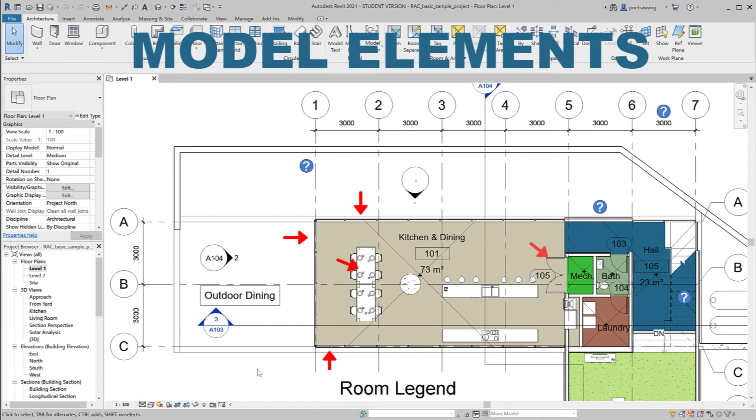Take this sample project for instance. The dining set that you see on the floor plan is an example of model elements. Windows, doors, toilet, kitchen sink are also considered model elements as well. The next item is datum elements. In order to understand datum elements, it helps to have some basic understanding of how three-dimensional software works.

Three-dimensional software utilizes a Cartesian coordinate system, x, y, and z, in order for an object to take physical form in three-dimensional space. Points are created in relationship to the origin, which is where x, y, and z intersect. And those points in turn give a physical object width, height, and depth.

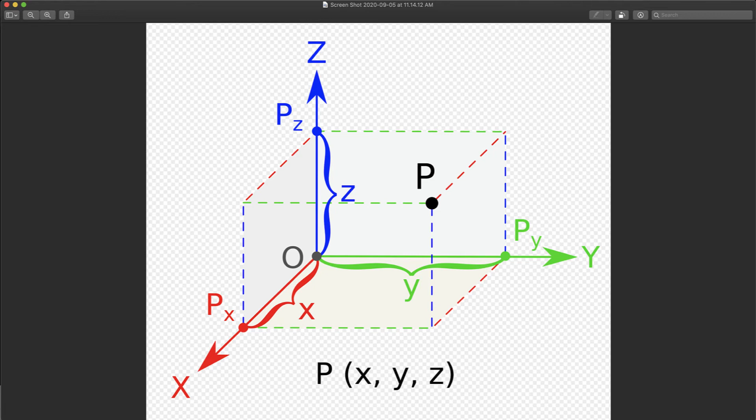Now in order for an object to exist away from the origin, an offset is used. An offset can be from one axis or all three axes at the same time. It can also be in the positive direction or negative direction or a combination. For example, column grids are used in floor plans to give horizontal references in the x and y direction. On elevations and sections, elevation levels are used to give vertical references in the z direction.

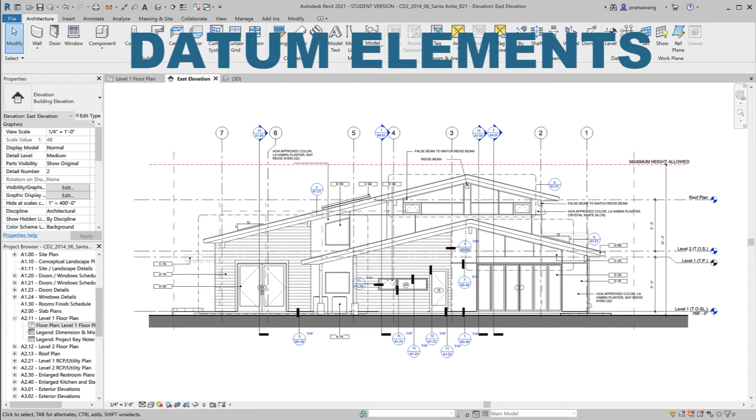It is kind of tricky at the moment to show you an example of how column grids are used, but I can give you a quick example of how elevation levels are used as a reference. If we just take a quick look at window number 28 on the floor plan, right-hand side of the screen, it is selected at the moment, and in the property palette, it is referencing Level 1 Top of Slab.

Beneath that, it is showing that the bottom of the window, which is the window sill, is offset 3 feet 6 inches from Level 1 Top of Slab. So the selected window is currently referencing Level 1 Top of Slab. Now if you can imagine with me that Level 1 Top of Slab is a sheet of paper that spans horizontally to the infinite, and we're using this plane as a reference plane.

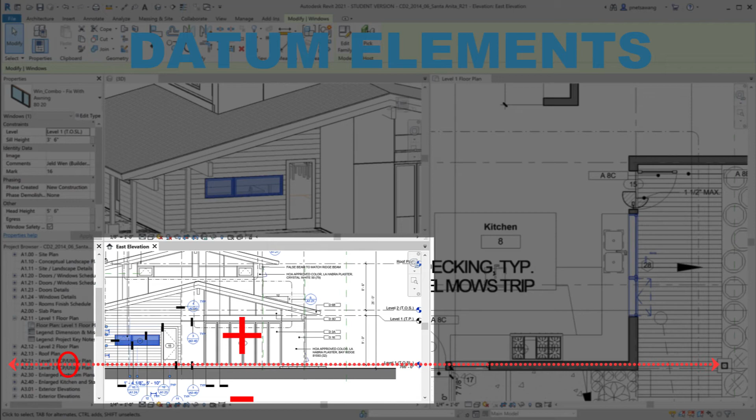The location of this plane is 0 in the z direction. Any object above this plane will have to have a positive offset. Or if you want any object to be below this plane, the offset has to have a negative value. Now if I want this window 28 to move down, I have to reduce the offset and therefore make the window closer to the reference plane. Here I am going to change the value to 2 feet 6 inches instead of 3 feet 6 inches.

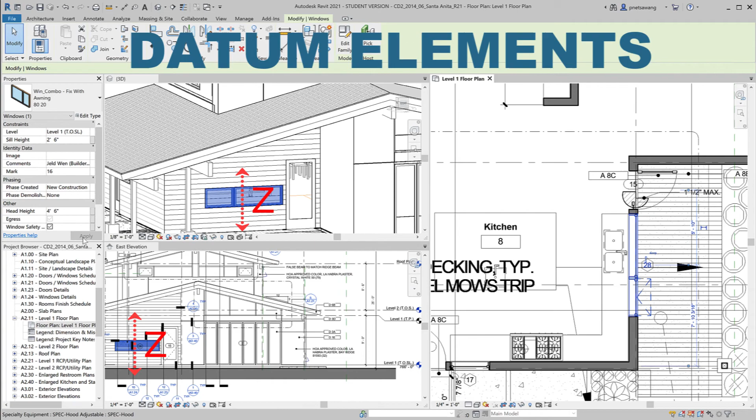You will see that window 28 moved down from its previous location. What just happened was the window shifted along the z-axis and toward the negative direction. Now, the bottom of the window or sill is 2 feet 6 inches from Level 1 Top of Slab.

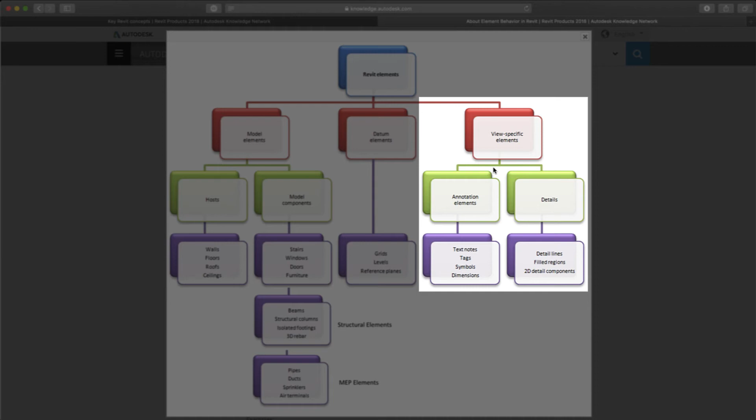Finally, view-specific elements. Think of view-specific elements as elements that give your project a final finishing touch. Examples of view-specific elements include dimensions, annotations, room tags, window tags, etc. Back to our example floor plans, you can see that we use dimensions to give us, for example, distance between grid lines, width of specific rooms, and location for windows and doors.

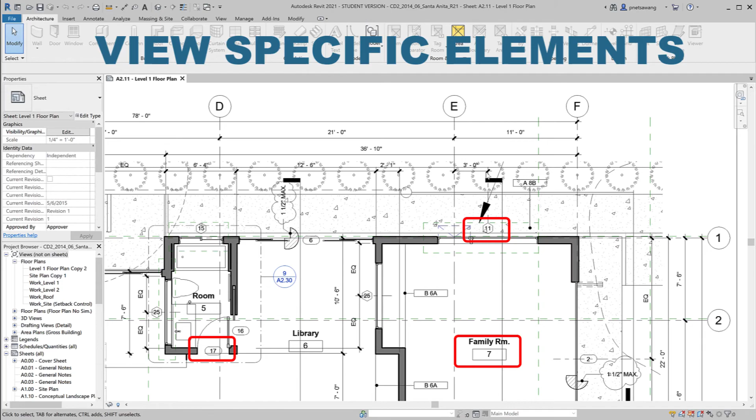Room tags, window tags, and door tags give us reference to the room finish schedule, door schedule, and window schedule. View-specific elements exist in a specific view only and will not get transferred to other views unless we specify it. Those are just a few examples of view-specific elements.

Next, I want to talk about element hierarchy. Every Revit element is organized in this fashion. It starts with category, then family, then type, then instances. With category being at the highest level, it is the most general, and instances at the lowest level, it is the most specific. Let's pause for a moment and think about category.

Category is something very, very broad. For instance, plumbing fixtures is a category because plumbing fixtures can include toilet, sink, faucet, etc. Furniture. Furniture can be a category because furniture can include chair, table, coffee table, etc.

For this example, we're going to take a look at walls. Wall falls under category, but then it can be further defined by stucco wall, concrete wall, or CMU wall. Those three items belong to family.

Now if we just focus on stucco wall. Stucco wall can have various thicknesses. It could be 4 inches thick, 6 inches thick, 8 inches thick, or even thicker. Now these thicknesses further define stucco wall, and therefore they belong to type.

And now if we focus even further into just one type of wall, let's take 8 inches stucco wall for this example. This 8 inches stucco wall can be stuffed with an R15, an R19, or an R30 insulation without affecting the thickness of the wall. And therefore, the 8 inches stucco wall with different types of insulation falls under instances. Hopefully you can see now how element hierarchy starts from the most general and works its way towards specific.

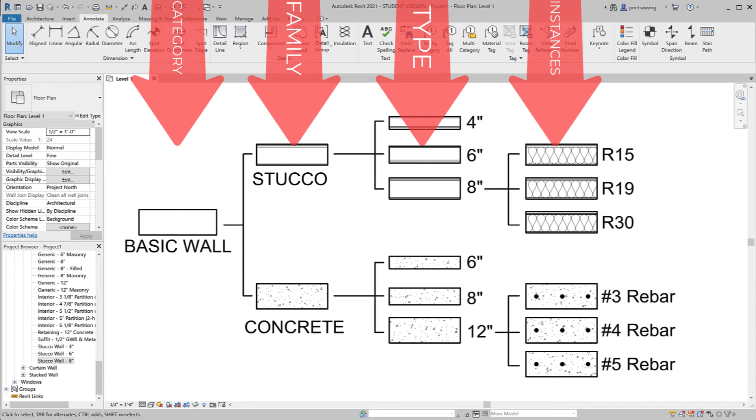A similar situation can happen with a concrete wall. Concrete wall can be 6 inches thick, 8 inches, or 12 inches. Take 12 inches concrete wall for example. The 12 inches concrete wall can have different sizes of rebar. It can have number 3, number 4, or number 5 rebar.

Let's have a look at how this wall originated in Revit. So if I go to Architecture tab, Wall, that is the category. Then on the Properties palette, under Type Selector, I can select the family and the type of wall here. On this list, various wall families and various wall family types are displayed. If I scroll all the way down, these are my custom stucco walls. So here you see that stucco wall is a family and the type of stucco wall is 4 inches.

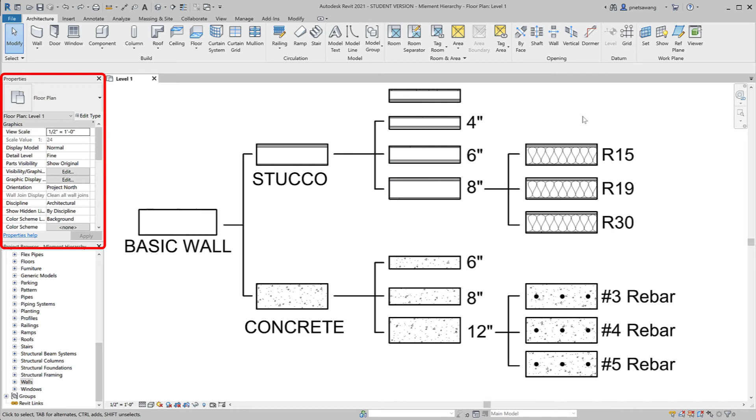If I take this wall by clicking it and place it here right next to my previous 4 inches wall, it'll look identical. Now if I click on the existing 4 inches stucco wall, the Properties palette will show us that the wall family is stucco wall and the family type is 4 inches.

Now I'm going to select the 6 inches wall. Here, the wall family is still stucco wall, but family type is 6 inches. Again, the wall family here is still stucco wall, however, the family type is 8 inches. If I work my way to the right and select one with the R15, you will see no changes in the Properties palette.

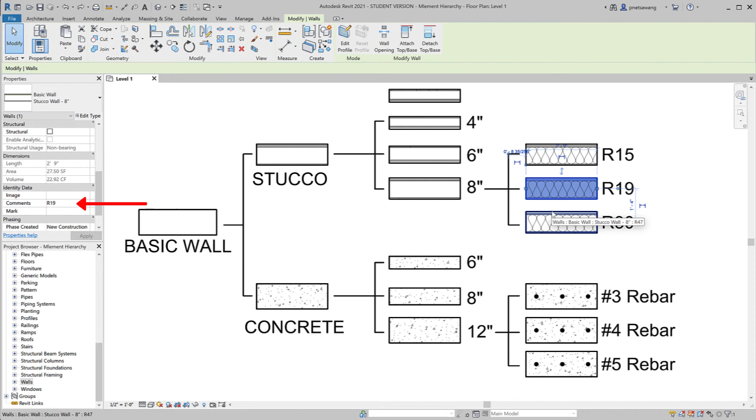However, if I scroll down and look under comment, I made a comment at an instance level that said this wall has R15 insulation. I'm going to work my way down again and click on the R19. The comment changes again at an instance level that said R19 and R30 and so on. Notice that for the 3 walls selected previously, the category, family, and type remain the same. The only difference between those 3 walls is the comment, which was made at an instance level. The same structure works for concrete wall as well.

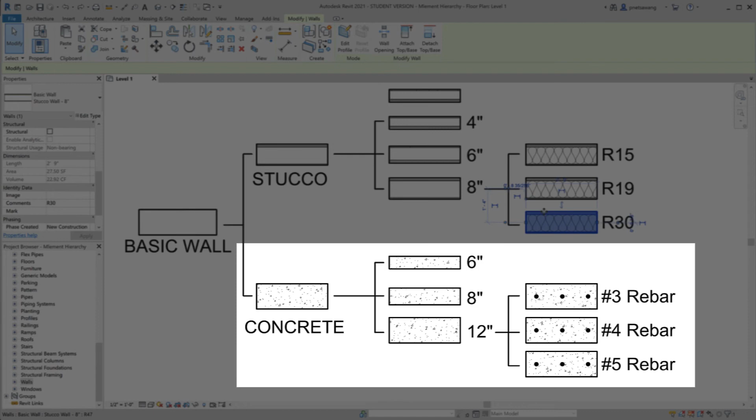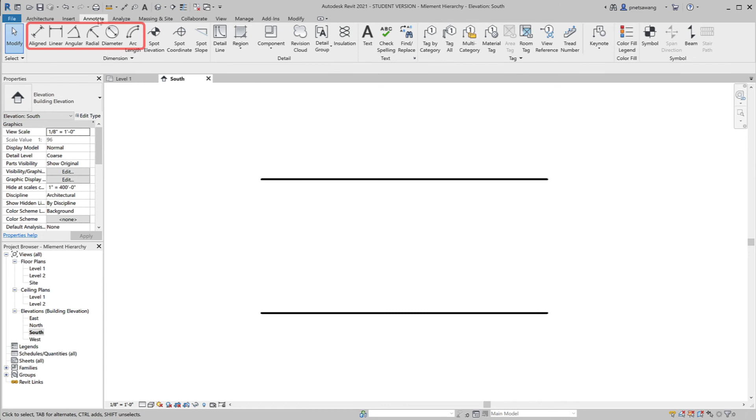So far, the examples I gave you were of model elements. Let's see some examples of how element hierarchy looks in view-specific elements. Let's take dimension for instance. To select dimension, on the screen, I will select Annotate tab. Then right off the bat, you see that dimension is the category, and you see different types of family, which are aligned, linear, angular, radial, diameter, arc length. At family level, I'm going to select linear.

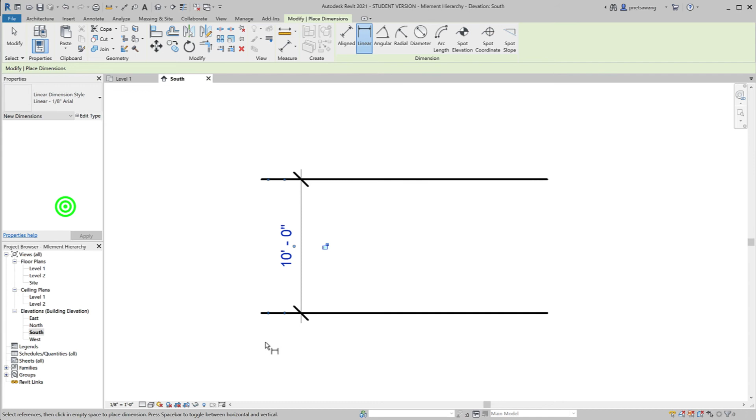Under type selector, the first example I'm going to pick is going to be linear 3/32 Arial. For the next example, I'm going to select linear 1/8 of an inch Arial. And for the last example, I'm going to select linear 1/4 inch Arial.

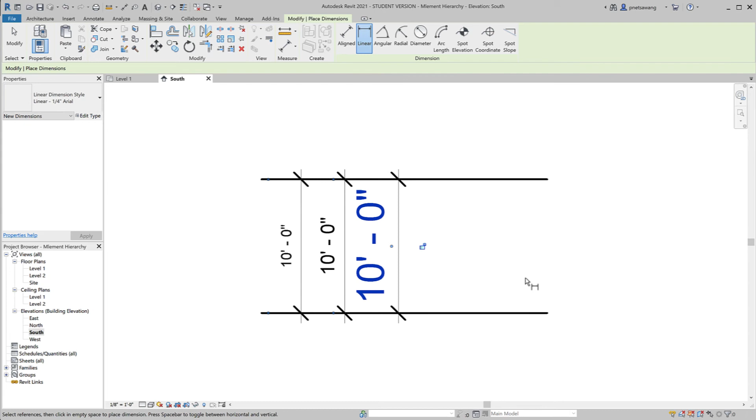The three examples that you see on the screen are all of the same category and same family, but different family type. In this example, the category is dimension, the family is linear, and the family types are 3/32 Arial, 1/8 of an inch Arial, and 1/4 inch Arial. I'm going to hit escape twice to get out of the current command. For this example, there isn't much that we can change at an instance level. Let's have a look at what we can do.

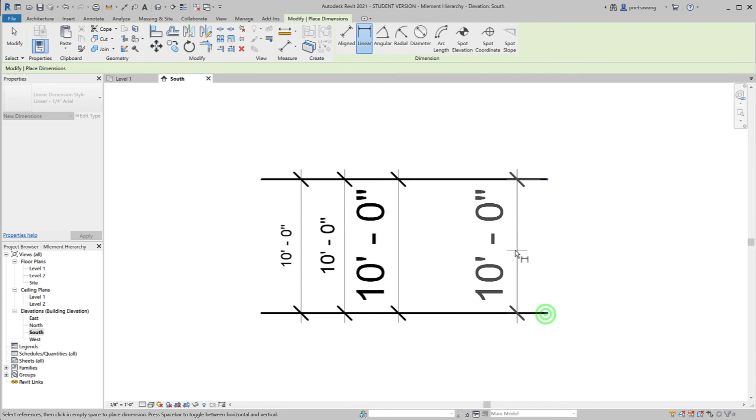I'm going to use linear dimension again and add one more dimension over here. I'm going to change this to 3/32 Arial and get rid of the other two. Now we have two identical dimensions. They are identical in terms of category, family, and type.

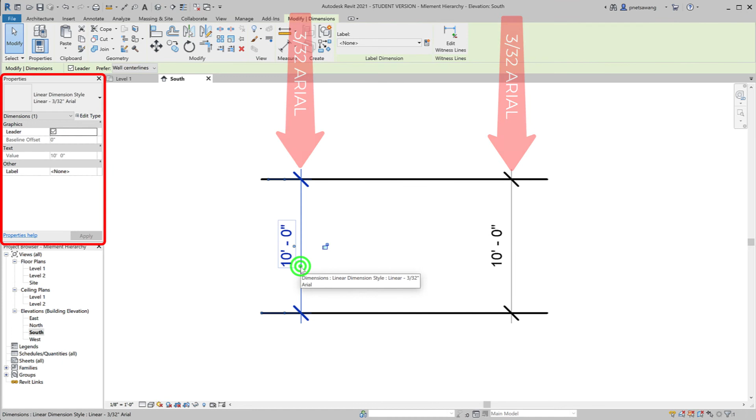If I select one of the dimensions, any changes that can be made in the property palette will be at the instance level. Let's see what this does. The leader is checked at the moment. So if I pull this out from its home location and do the same, you can see that the text leader is added to both dimensions.

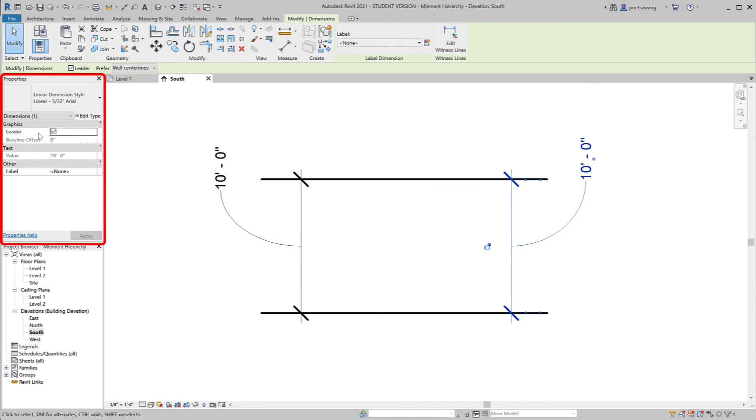With the dimension on the right selected, if I uncheck, the text leader is removed. Although these two dimensions are of the same category, same family, same type, they are no longer the same instances.

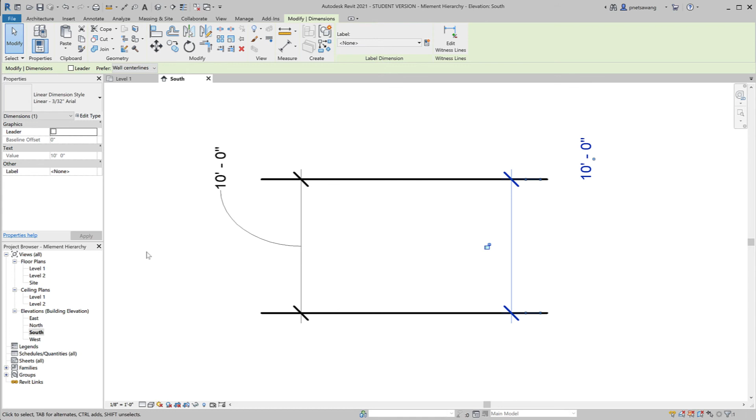So with the two examples I just gave you, hopefully you can see that even though Revit handles model elements and view-specific elements a little differently, as far as element hierarchy is concerned, they are both structured exactly the same way. At this point, I think you have an idea, so I'm going to skip an example for the datum elements. Finally, we can look at how element hierarchy helps us work more efficiently in the Revit

environment. In this example, I added cars and a dining set on my construction document set for reference. But the line weights are a bit too dark, making it difficult to see other information that is more important. So I can make the lines for those items lighter and less distracting. With the element hierarchy structure, I can just select one of the objects.

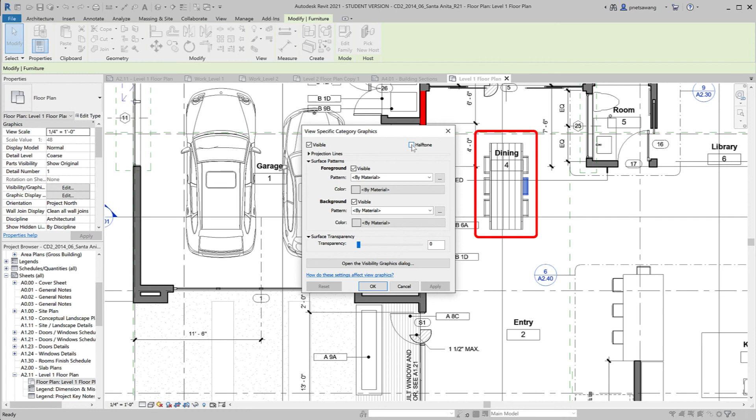In this case, I'm selecting the dining chair, right click, and override graphics in view. I'm going to check anything under the same category, in this case anything under the furniture category. Then change it to halftone. As you can see, not only does the selected dining chair change to gray, the other dining chair along with the stool around the breakfast nook and the dining table change to gray as well.

This can happen because even though those three items are different families, they share the same category, which is furniture. For that reason, we were able to select them and change them all at the same time. I can do the same for cars. Just hover over one of the cars, right click, select override graphics in view, and then by category, because I want everything in the same category as the car to be selected.

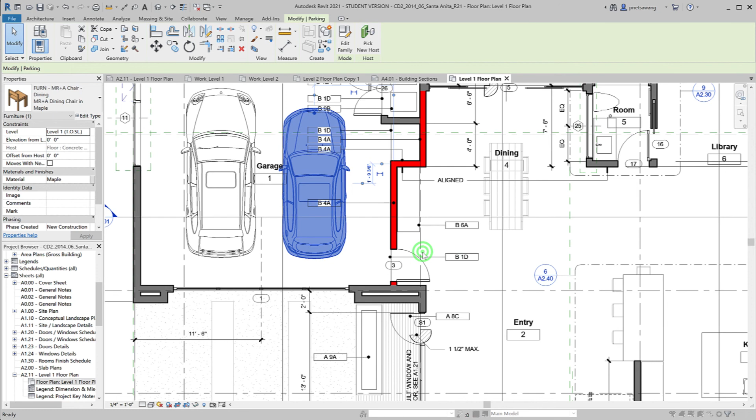I'm going to change them to halftone, and there you can see it again. Not only did the selected car turn gray, the other car next to it, since it shares the same category, turned to halftone as well.

One last example of how we use element hierarchy to work more efficiently in Revit is this. Say you got a call from marketing asking for a floor plan they can use for marketing purposes. The floor plan we have here is for construction, but we can quickly clean it up by getting rid of elements that are not necessary for marketing. Let's take a look at how it's done.

We can window select everything and use the filter to help us select only the items we need. On the top left corner of the dialog box, you can see that category is used as a tool for this filter. Next, I'm going to deselect everything, then reselect only the items I want to get rid of.

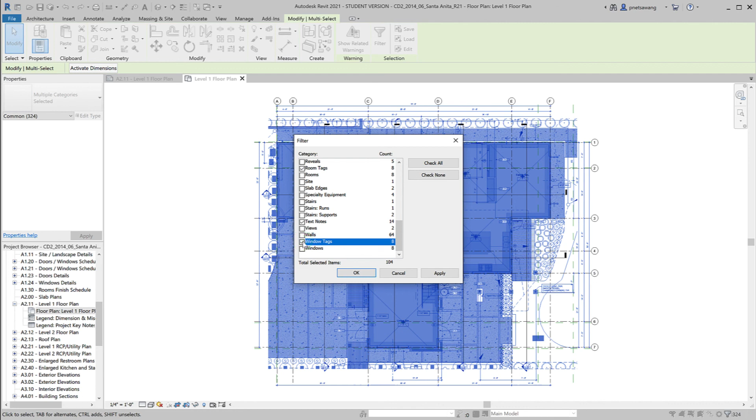Dimensions, door tags, keynote tags, room tags, text notes, and window tags. Once I click OK, only the items with the check mark will be selected. Here, the selected items are shown in blue.

By hovering over one of the items shown in blue and right-clicking, you get a drop-down menu. Since I don't want to get rid of these items permanently, instead of deleting them, I'm going to select Hide in View, then Elements. Now it looks a little less busy, but I noticed that I missed the detail callout.

So I'm going to hover over one of the detail callouts and right-click to get the drop-down menu. This time I'm going to use Select All Instances. The elements that get selected not only have to be in the same category, family, and type, the instances have to match as well. Since I only want the changes to occur in this view, I will select Visible in View. The detail callouts that meet all those criteria will be highlighted in blue.

Now you can hover over one of the detail callouts, right-click, then select Hide in View, Elements. At this point, I'm pretty sure you get the idea. Even though this concept may be a little difficult to understand for beginners, the more you use the software, the more you understand how important it is. Beginners, I encourage you to watch this video once, then come back and revisit it as you use the software more.